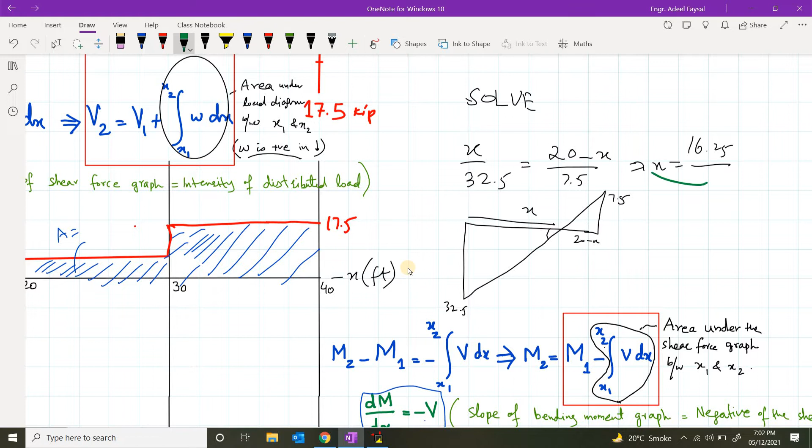So we need to locate the point where shear force goes to 0. So we need to consider similarity of triangles between this red triangle and this triangle. From the similarity between them, you should be able to find x, the distance of that 0 shear point from the left end. So we come to know this is 16.25. So at 16.25 from the left, this is the point where shear force goes to 0. All right, let's move on to the next point.

Now you can see that since there is no load between point B and just to the left of C, this will continue straight up to this point, and just to the left of C, the shear force remains equal to 7.5 kip, and then when you just go beyond point C, just to the right of C, there is a jump in shear force diagram equal to P load itself. So V positive face minus V negative face equal to P. We have discussed this before.

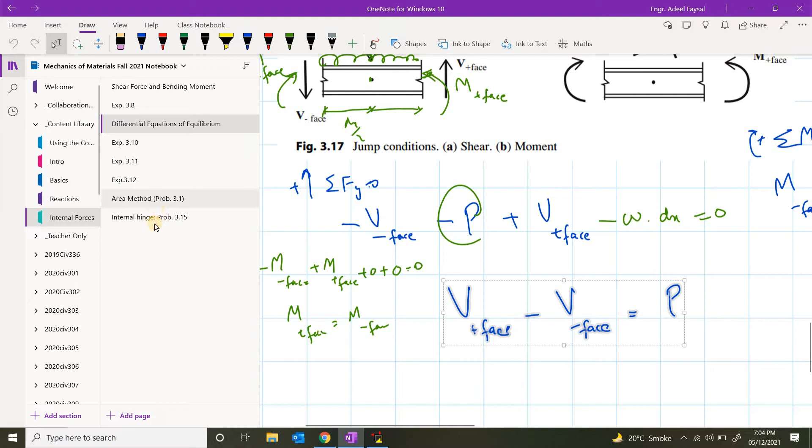So if you want to find the V positive face, you take this term on the right side. So this becomes V positive face equal to V negative face plus P. So this is how you can calculate. So that means this will be 7.5. Let me write the expressions for you. Just before point C, just to the left of C, the shear force is 7.5 kip.

Sorry, V negative, this is the V negative face value, okay. And we need to find V positive face, which is just to the right of C, and this is equal to V negative face plus P, where P is taken downward positive. So if you put these values, 7.5 kip plus P, 10 kip, it is downward, so we consider it positive. So now you see that this will become 17.5 kip.

So this is how we calculate the change in shear force as we encountered a concentrated load. So this was 7.5 kip, and then now this is 17.5 kip, as you can see over here. So this is how we calculated these things. And then let me remove this. We're done with this.

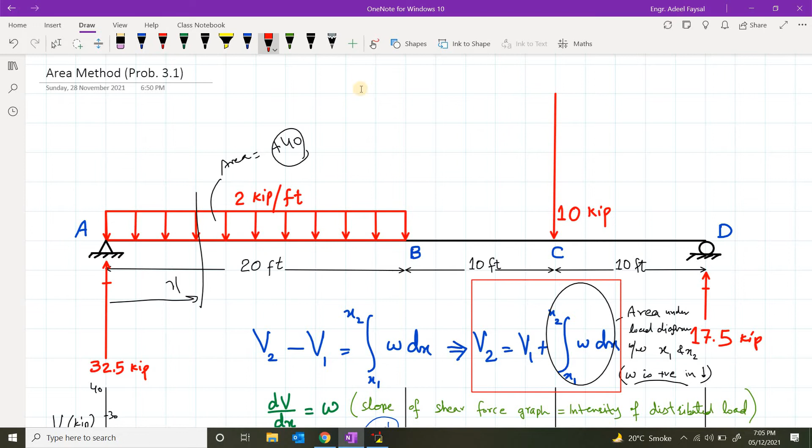All right, and now once you are just to the right of C, your shear force goes to 17.5, and then it continues at that value because there's no load encountered between C and D. So it continues 17.5 just to the left of D. I shouldn't say it goes down to 0, but this is what the value at the end is, 17.5 kip.

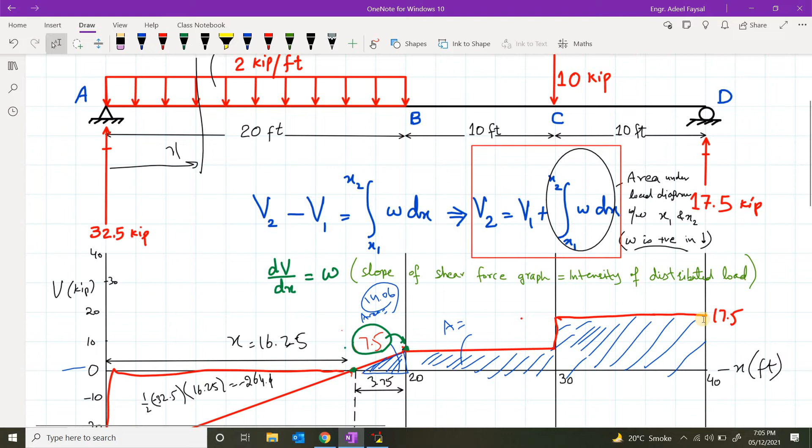So the shear force diagram is complete. You can confirm that this value is the same as the reaction over here. So this is confirmation that the shear force diagram has been correctly plotted.

And then for drawing the bending moment diagram, you will need to look at the shear force diagram, because this is the relationship between the bending moments at two sections. So the bending moment at section 2 is equal to the bending moment at the previous section minus the area under the shear force diagram between those 2 points, x1 and x2.

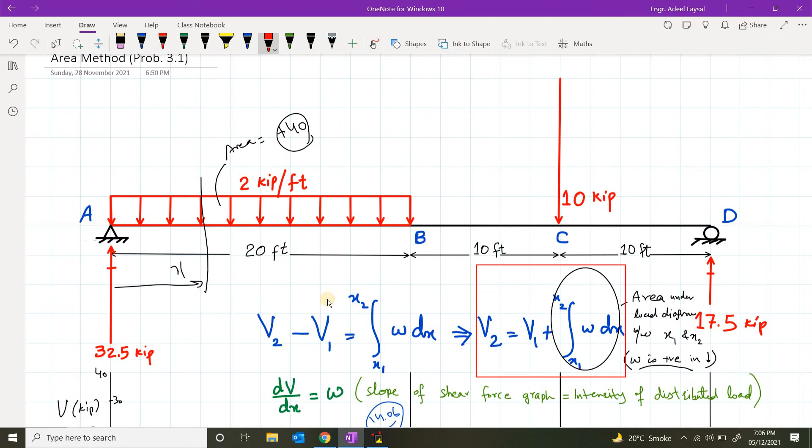So for that, again, we need to know the bending moment at the starting point, which is 0 in this case, because there's no moment reaction over here and no applied moment. We start from 0, and then the change will take place as we go along the span of the beam. We are interested in finding the new value of the bending moment at this point. You see this is a straight line going on, so you calculate the bending moment at the point where shear force goes to 0.

For that, you need to know the area between these 2 points: this point and the point where the shear force goes to 0. So you need to calculate the area under the shear force diagram between these 2 points. Since it's a triangle, it's quickly calculated as half base into altitude, one dimension into the other dimension. So this dimension is minus 32.5. So then you will get minus 264.4. This is the area under the shear force diagram between point 1 and point 2.

So the bending moment at point 2, where shear force goes to 0, you calculate like this. Look at this formula, I'm just using this formula. M2 is equal to M1 minus the area under the shear force diagram between x1 and x2. You can write it whatever way you like.

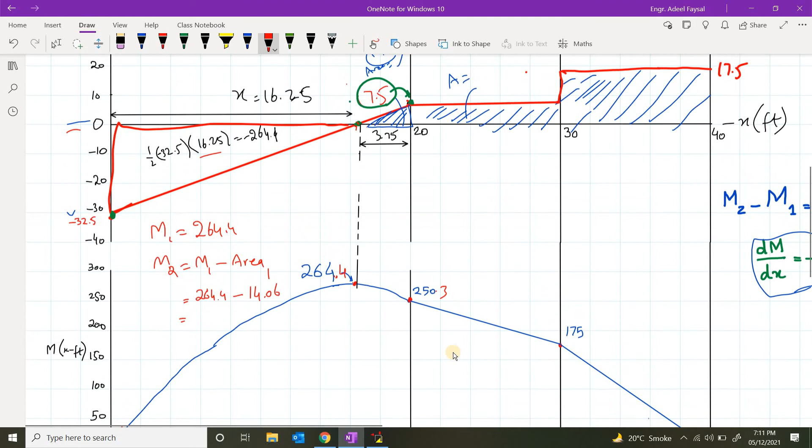Now again, let me tell you why I joined these 2 points, this point and this point, by a second degree line and not a straight line: it is because this was a first degree line. The shear force diagram is a first degree line between these 2 points. So this must be a second degree line, one more than the previous. So it had to be like that.

And why should I join it this way and not this way? Because you know that the shear force at this point is 0, and that means the bending moment diagram should have a 0 slope at this point. And this is only possible if I draw it like this. I cannot get a 0 slope if I start drawing this shape. So this is why I'm drawing it this way instead of this way.

Okay, and similarly, why should I join them by a second degree line? This is also a second degree line. Because the shear force is a first degree line between these 2 points, so it must be a second degree line. Again, the same reason. And why should I join them the way I have joined? Because this is the only way I can join them satisfying the slopes. If the shear force at this location is 0, the bending moment diagram slope must also be 0, and this is the only way I can join them.

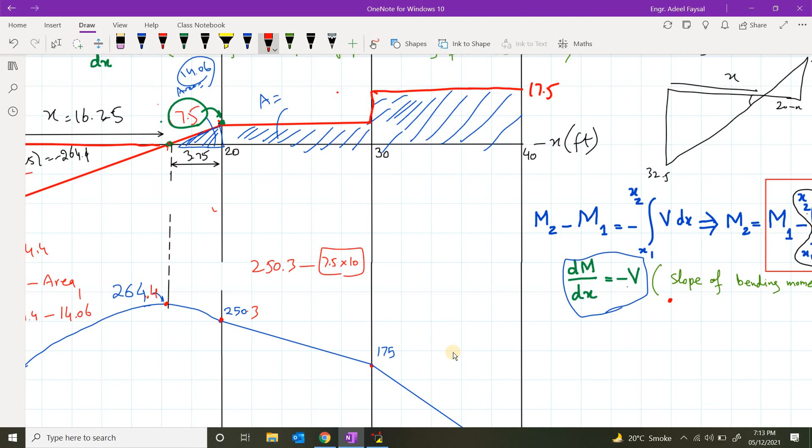And then from this point onward, the bending moment at this location: use this value 250.3 minus again the area of the shear force diagram between these 2 points. So this area is 7.5 multiplied by 10, so you get about 175. And now you should join them by a straight line, because this line is a 0 degree line, so this must be a first degree line, which means it should be a straight line.

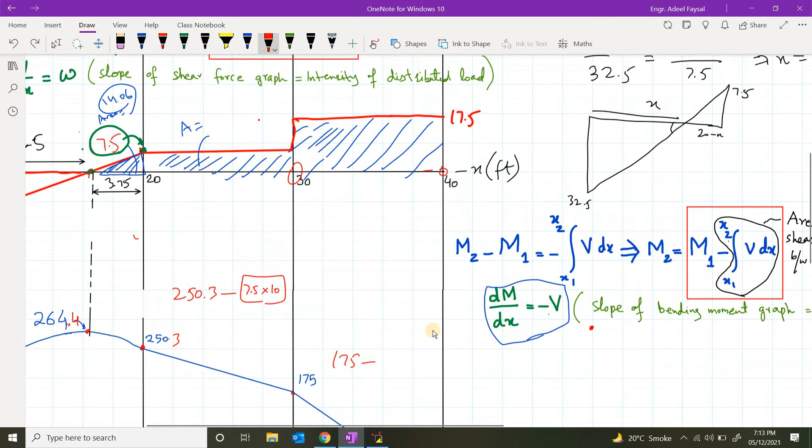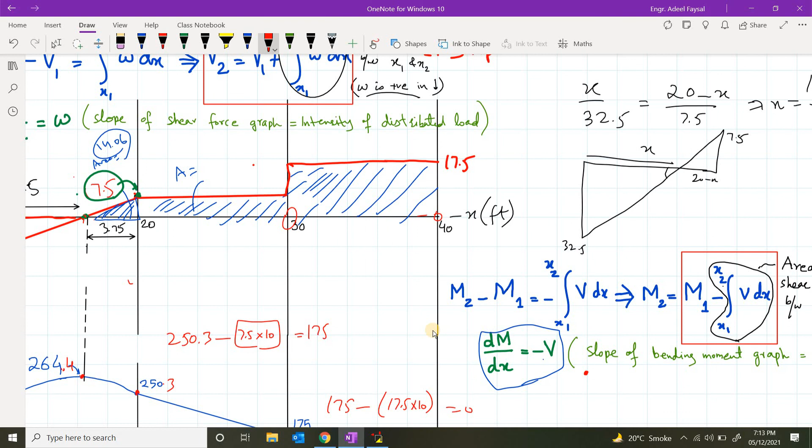And then again, from this point onward, you would say 175 minus the area under the shear force diagram between this point and this point. That area is 17.5 into 10, and this happens to be 0. The previous value was about 175. This is 0, so this is why you are here. And again, this is a 0 degree line, so this must be a first degree line, and this is why you have joined by a straight line. So this is how you complete the bending moment diagram.

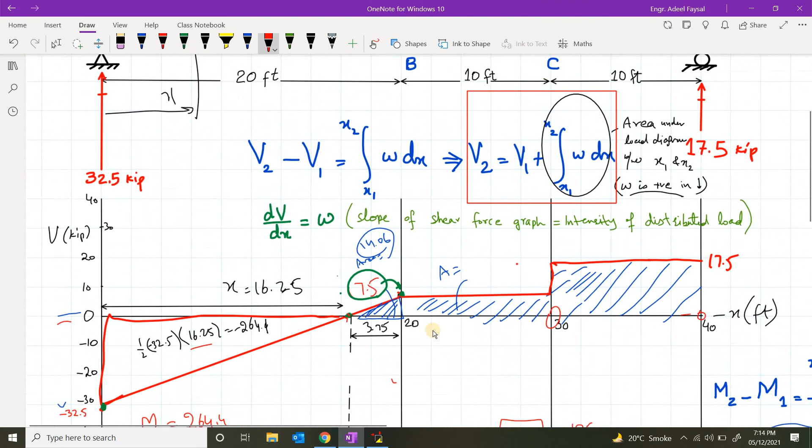So in the area method, you draw the shear force diagram by looking at the load diagram, and then you complete the bending moment diagram by looking at the shear force diagram.